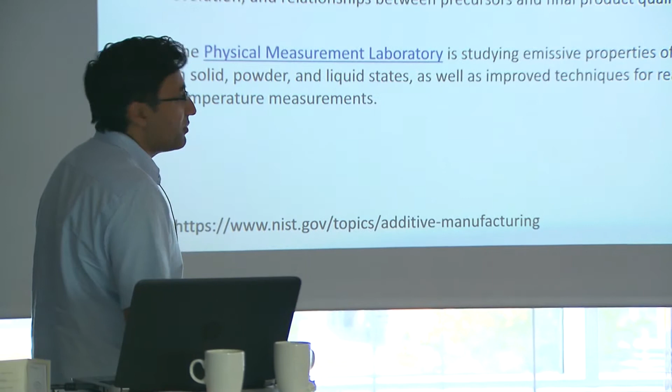As you can imagine, there's a huge interest, and there's a very large program at NIST devoted to additive manufacturing and pushing it forward. If you're interested, you can go to this website or just ask me, and I can put you in touch with the relevant people working in additive manufacturing.

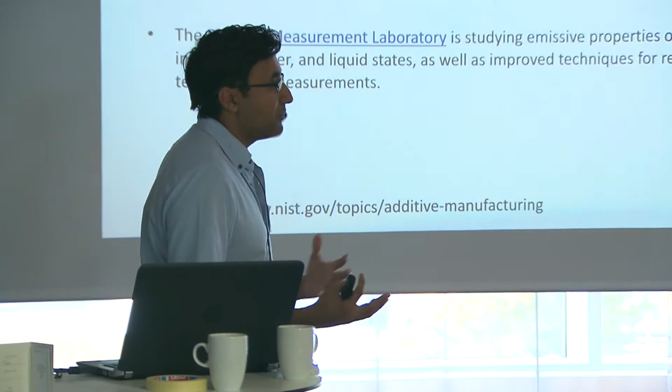Very broadly generalizing here, the engineering lab is working on things like material characterization, process control, and how to improve the final quality of the product. The material measurement lab, which is mostly chemists, is working on the relationship, amongst other things, of how the starting materials' quality affects the final product's quality.

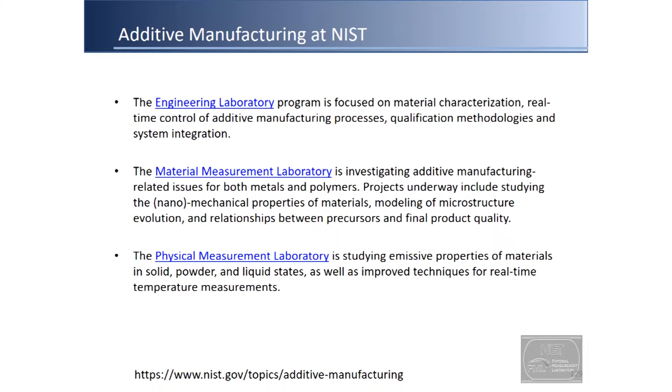Then you have the physical measurement lab, which is mostly physicists. I'm a chemist who works in the physics lab. There, the focus is mostly on developing new measurement science tools.

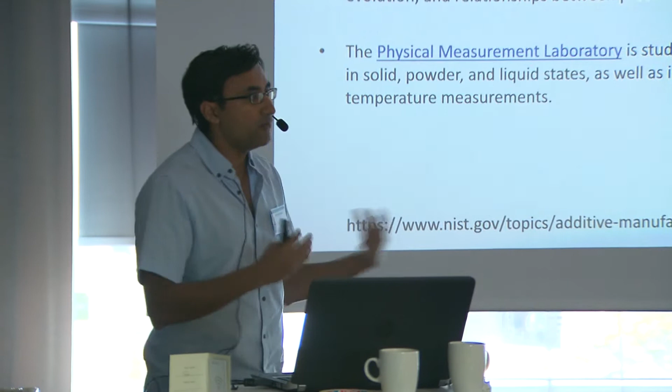The idea here is, for instance, to be able to measure temperature by looking at the emissive properties of materials, so you can have better process control. This is a holistic program that looks at the entire process and how we can improve it to push additive manufacturing forward.

At NIST, I'm part of what's called the thermodynamic metrology group. That's a group charged with the realization, dissemination, and maintenance of the national standards for temperature, pressure, humidity, vacuum, and helium leaks. We provide the basic calibration services, but we also do a lot of innovative research.

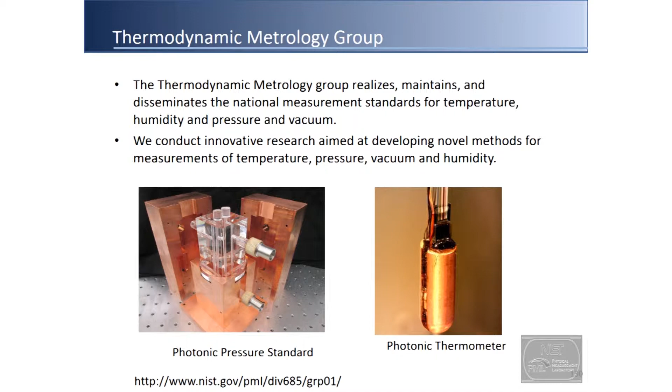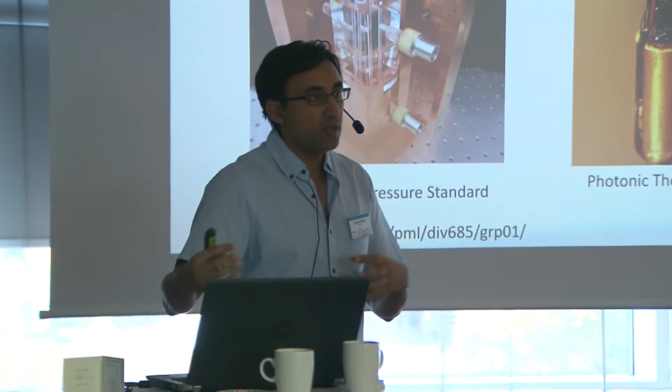Over the last few years, a lot of our focus has been in photonic sensing. One of our projects, led by Jay Hendricks, has been on photonic pressure standards—rather than using mercury manometers, using the refractive index of gas to define pressure. My team does mostly silicon photonic sensors, so a lot of work in temperature, but also in humidity and increasingly in pressure.

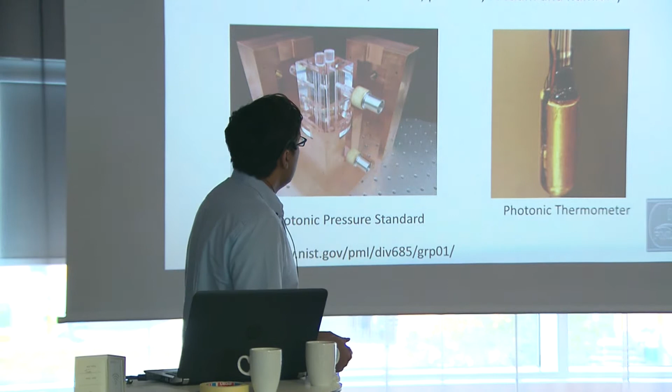So you might ask, what are people who do photonic research doing in additive manufacturing? Well, we're mostly approaching this from the perspective of the users. We want to do what almost every user playing around with 3D printing is doing, which is to conserve their resources, time and money, and we want to take advantage of the freedom of design that comes from additive manufacturing.

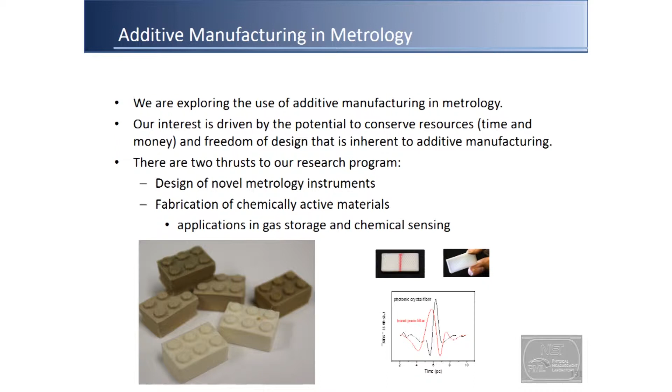Sometimes that freedom comes. There are two areas we're interested in. One is instrumentation: can we shrink it down, make ours more deployable, more easy to use—almost, it's a crude way of putting it, but idiot-proof in a way. The other is this idea of being able to do chemically active materials.

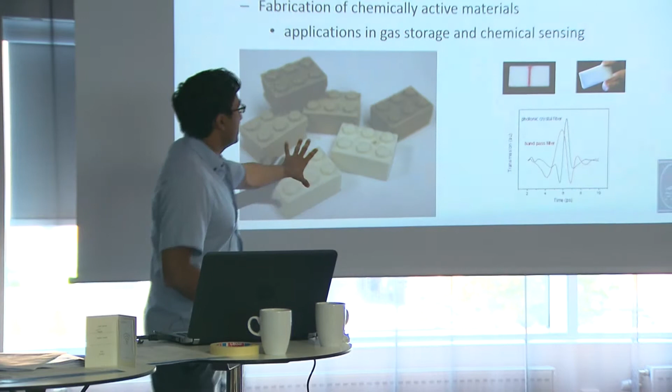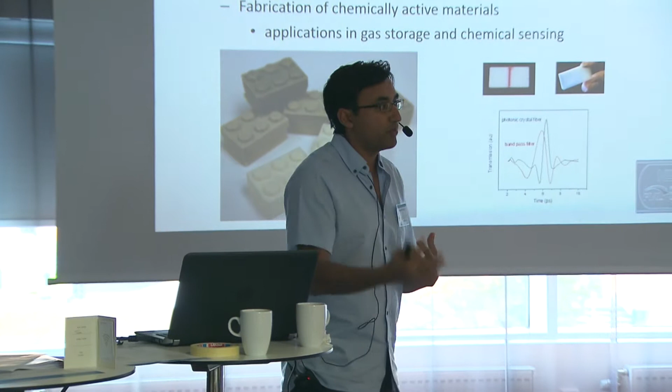So make little blocks that can store gases, release gases on demand, and are safer to handle, and also be able to print sensors that can pick up gases and give us information about what gases are present. These would be things you could do in the terahertz or microwave range—again, building chemical sensors, things like that.

Let's talk about metals first. Our interest in metals came because we have a team—Jim Fedchak, Julia, and Steve Eckel—working on this. The idea here is to make a new national standard for vacuum.

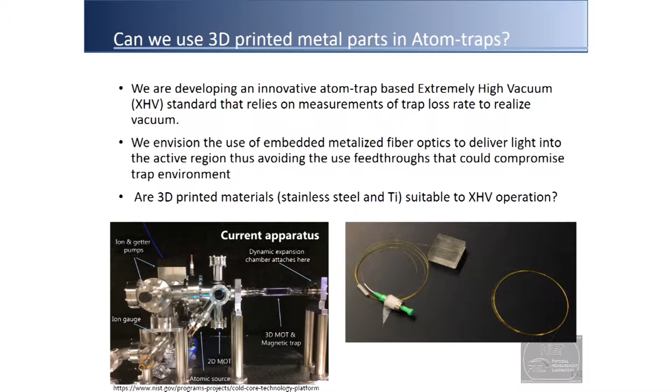More specifically in the XHV range, that's 10 to the minus 10 pascals or lower in pressure. The idea is to look at the loss rate from an atom trap. If you can calculate the collision cross sections of the atoms in the atom trap really, really well—that's the big push in that particular project—then you should be able to look at the loss rate and relate that to the residual gas pressure present in the chamber.

That's how we wanted to be able to define ultra high, extremely high vacuum. This is the apparatus as it exists—this is a MOT, so you can see it's a very large thing, with a lot of connectors and things like that.

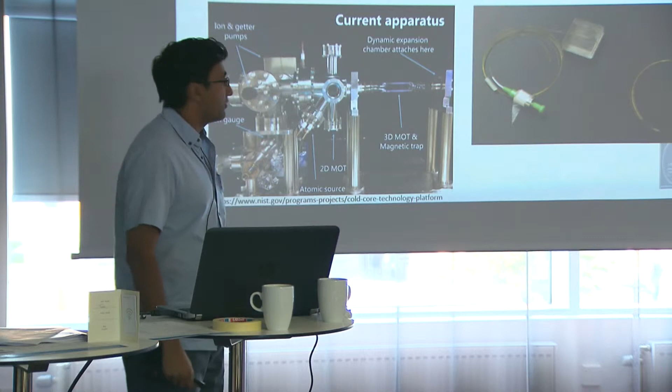One of the questions we have is, can we, rather than doing free space optics, bring waveguides directly into the chamber, eliminate all of these feed-throughs and other connectors where things can leak, and really create a more compact, robust system suitable for these sort of operations.

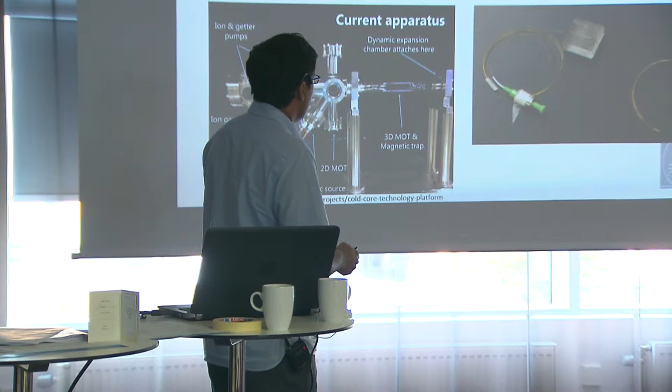We've been playing around with embedding fiber optics in 3D printed materials. We've mostly worked with plastic materials, exposing these to radiation and things like that. So kind of some fun experiments there.

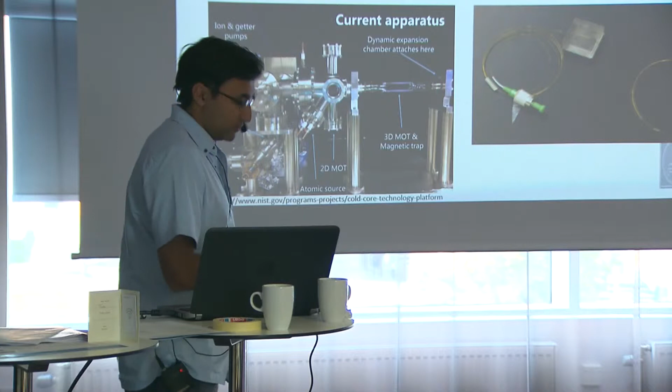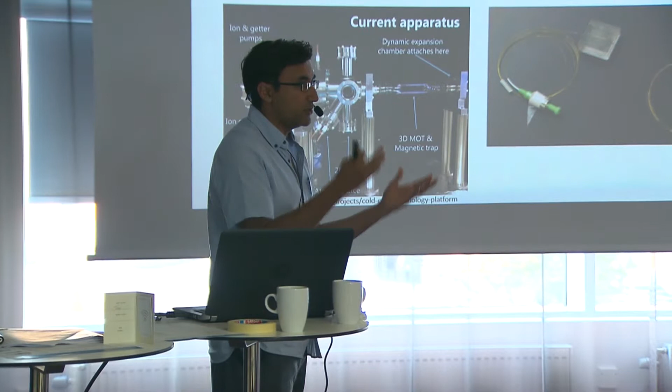But before we can do things with metals, the question we always had was the same one you guys had in the UK: you're creating these 3D printed materials, they're lighter, the density is lower, so there are all these voids. Are these suitable for XHV applications?

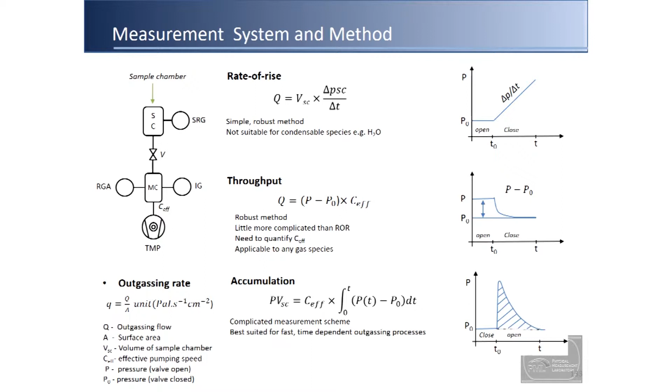The basic measurements we've done are the same ones everyone in vacuum does: the rate of rise, the throughput, and accumulation type measurements. We can go over these if you're interested. Again, the measurement protocol is the standard one people have been doing in vacuum science for a long time, and it's very laborious and time consuming. Basically, you're trying to get rid of all the water and hydrogen gas in your sample holders. Once you do that, you can look at what's coming off of your parts.

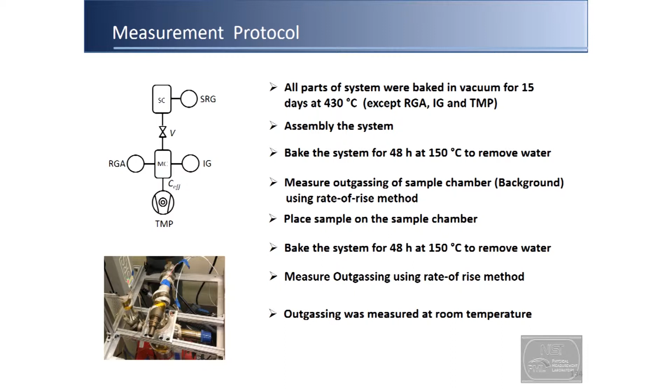So we started with titanium, and these came from Walter Reed National Military Medical Center. We started with titanium sheets because it lets us create a very large surface area compared to that of the sample chamber.

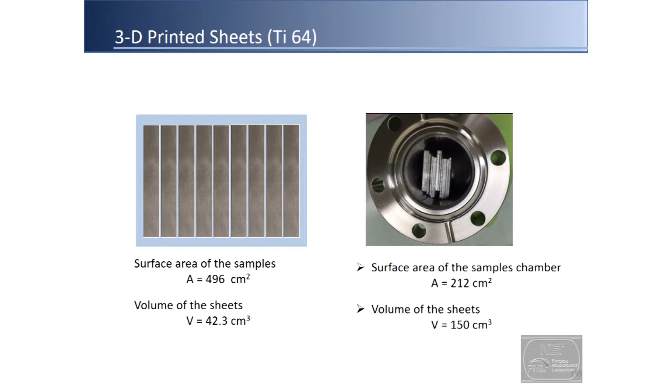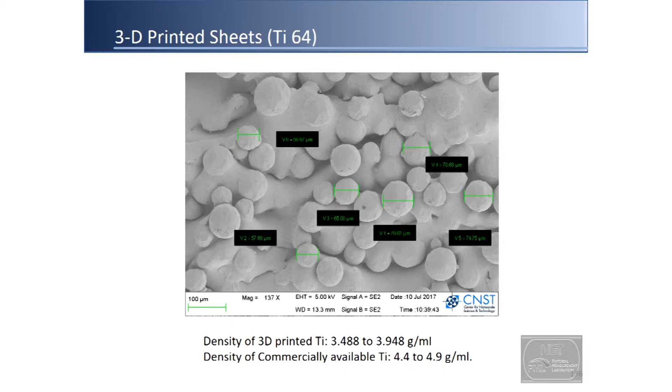So here's an SEM, and this is really what concerned us right from the beginning. You see the SEM, you see all the voids, you see the density drop. So we were worried about water molecules - are there waters trapped somewhere that are going to have a long outgassing rate, and that's going to destroy your vacuum over time? Because we want to get to a very low level and then stay there while we do experiments and have our instrumentation work for a long time period.

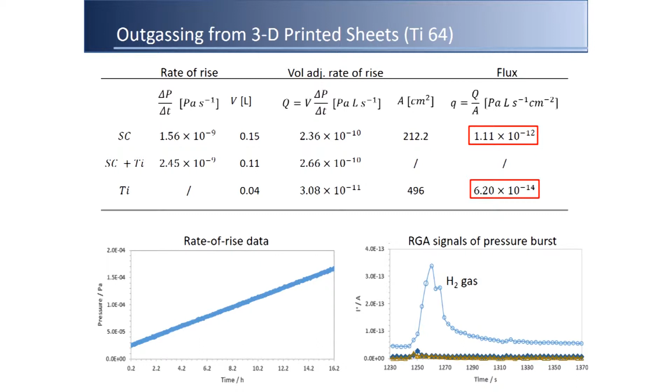So let's look at some of the data. When you look at the rate of rise, the first thing you notice is the sample chamber is pretty much on par with the titanium sheets, even though the surface area is so much larger. That's good news in a way, but from an engineering perspective, the number you care about is the flux, and you can see the flux for the titanium part is significantly lower than stainless steel, which is the good news here, right? This is what you expect to see. What's coming most off of it is mostly just hydrogen gas. So again, these are all good news.

So that seems to say, all right, we should be fine for using these for these purposes.

So we then went ahead and just had some very simple chambers printed. These are test chambers - hollow cylinders - and these tubes here are welded on, and they're meant for a spinning rotor gauge experiment, so you can measure the outgassing rate and how much the pressure is building up as these chambers sit there.

So far, what we can say is that the pumped on curves, just as you found, look very similar for both titanium and the 3D printed stainless steel. And in fact, they're very similar to what's in the literature for normal stainless steel. So what that tells us is the water molecules coming off of these are just sort of interacting with each other, or just with a bare surface. Their activation energies don't seem to be very different from what you typically see in materials.

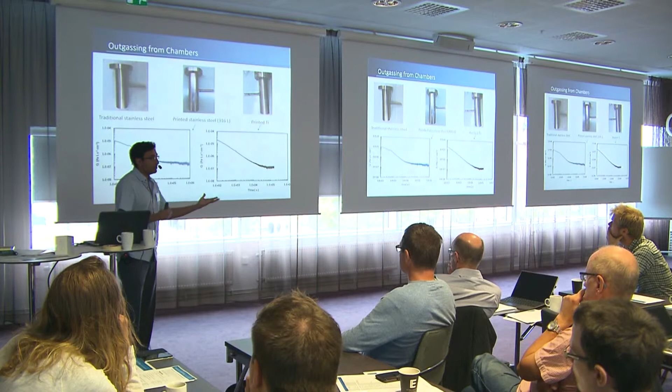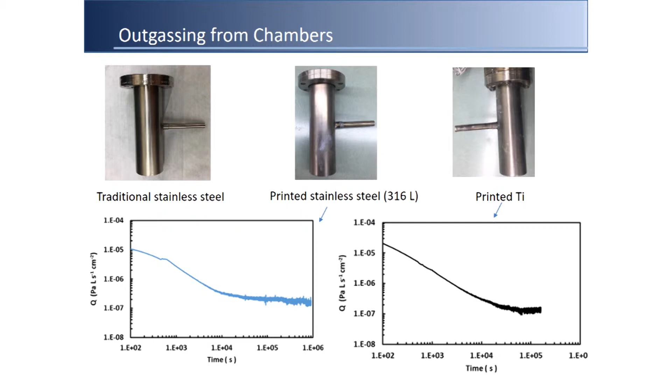Right now, we have experiments going on looking at the activation energies of water. We're doing the same pumped on curves at different temperatures to be able to extract those. So that work is still underway.

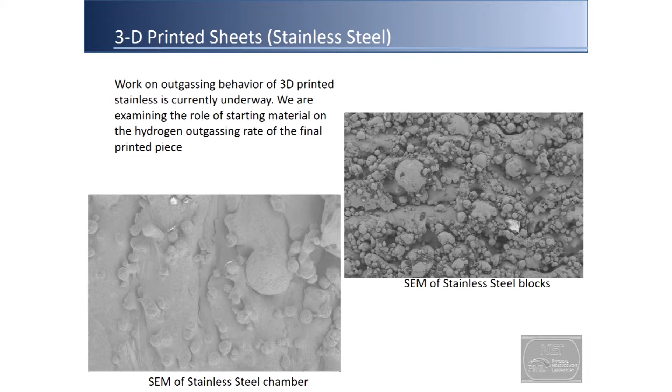With stainless steel, we have some more data on hydrogen outgassing, but we're not quite ready to talk about it - we're still analyzing it. One of the things we're looking at is when you get stainless steel parts made from different vendors, different processes, different starting materials, you get very different microstructures, right? So one question we have is, given the different amounts of additives people are adding, how is that changing the hydrogen outgassing rate? That's sort of work we're working on right now, and hopefully we'll have results relatively soon, just in a couple of months.

So let's shift to some of the chemistry work. This is work going on with our collaborator, Matt Hartings at American University in Washington, D.C. The idea is very simple: can you take the basic feedstock material like ABS, which is chemically inert - because that's useful for most cases - and make it more specifically attracted towards certain chemicals?

So one of the ideas we had was: can we store different gases in here that we can release for our chemical sensing processes when we want them? So essentially on-demand release of chemicals. And also, can we build sensors? With 3D printing - this is something people have done with polyethylene in the terahertz for a long time - you can print waveguides, whispering mode resonators, bandpass filters, things like that.

So our idea here is, if you could make a material that can absorb different gases like hydrogen or volatile organic compounds, then its dielectric constant should change as it picks these gases up. If you could build sensors in the terahertz range, you would have a 3D printed chemical sensor that you could build into your apparatus. So if you had a material that could store hydrogen gas, you could use terahertz to measure how much gas you were loading in real time. There are applications like that we are exploring.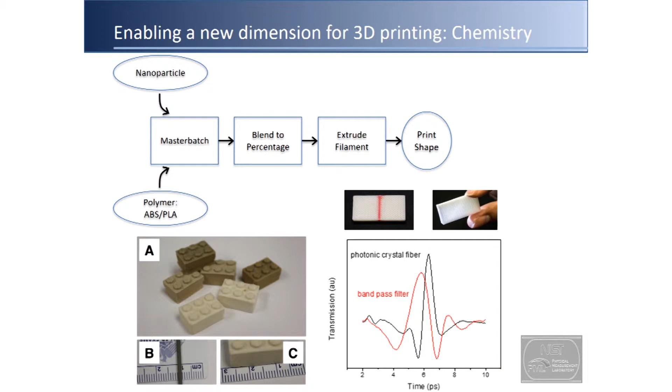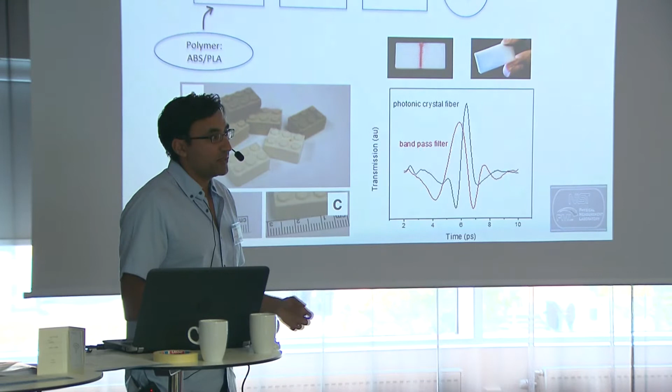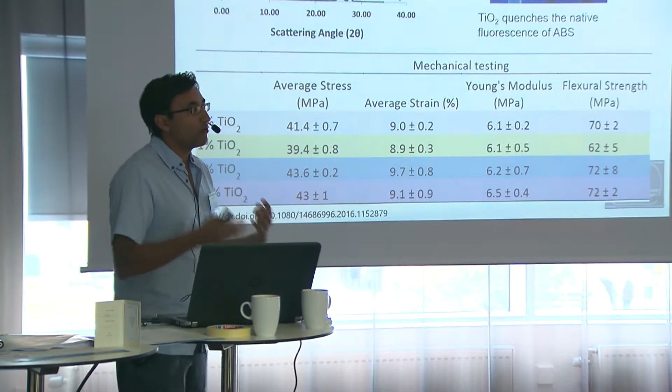Our process is very simple, or at least in theory it was very simple. You start with ABS or PLA, mix in nanoparticles, blend them, and extrude a filament that you can use for printing. Of course, you're trying to find a material that will actually print and won't degrade. So the first thing we did was start with a more robust system: TiO2 nanoparticles, mostly because they're harder to destroy.

One of the first things we did was make different blends. Starting with pure ABS, can we print? Yes, we are competent in that. Sure of our competency there, we went up to 1%, 5%, 10%. After that, it just basically becomes too brittle and doesn't print.

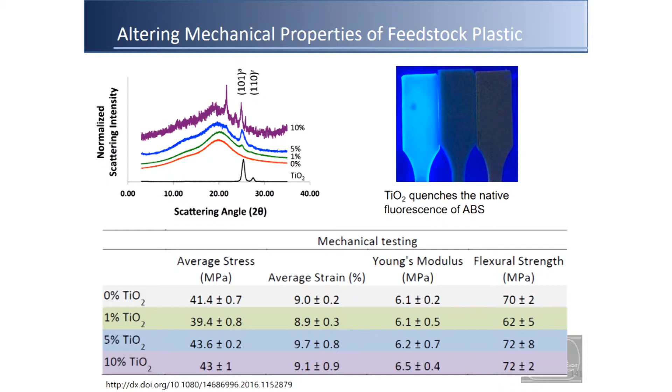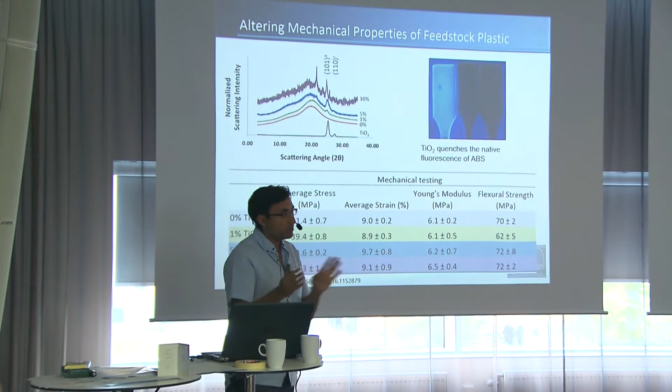So what do you find? Well, when you look at the X-ray diffraction spectra, when you print the piece, titanium is throughout the entire piece, so that's good news. It's not clustering out in one giant chunk somewhere. Its presence definitely changes the optical properties of ABS, so its native fluorescence is being quenched. More importantly, the mechanical properties strengthen up and then get weaker at higher loading factors. When you look at the IR spectra, that's because the TiO2 nanoparticles start to decompose or break down the polymer backbone. So this was an encouraging result.

So we moved on to gas storage materials. The chemicals we chose to work with are called metal organic frameworks, or MOFs. In the gas storage and uptake community, these are very famous molecules, mostly because they have these pore sizes. They are crystal materials with pore sizes you can change. You can engineer how big the pore size is by changing the organic linker molecules, so you can make these molecules more selective towards certain gas molecules. We started with MOF5, which is very well known for its tremendous capacity to store hydrogen gas. I'll tell you why we moved to ZIF8 and HKUST-1.

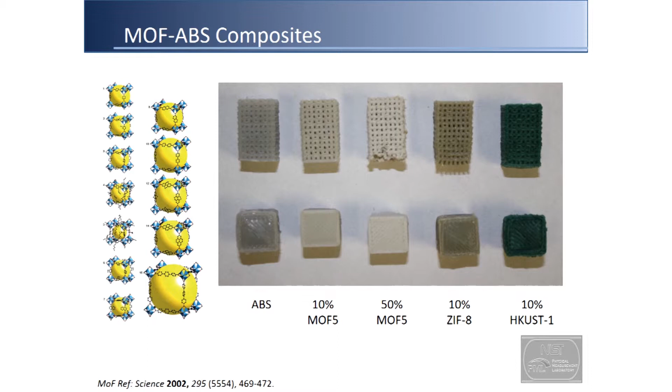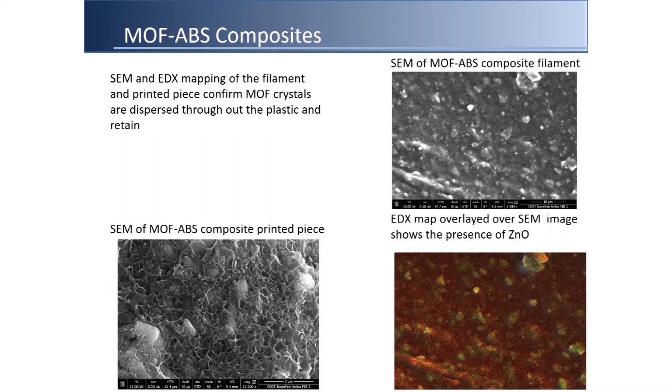Because basically, things that can go wrong will always find a way of going wrong. So we started, and it started out all well and nice. You make your composite, the filament, and you see crystals there. You 3D print the piece, and the crystals are all nice and present. If you look at the EDX map, those are zinc oxide, so these are real crystals, they have the zinc, so everything looks fine. It should work. So let's look at the ABS itself, the native ABS.

Well, it turns out it mostly likes to store water, in fact a lot of water. 360 hours after you bake it out, you can watch the water come on and on, up to 0.36% by weight is just water. The good news is you can still outgas most of this water. So it's still good enough for UHV applications, so we can do our measurements, but you need to bake it for 3 days at 100 degrees to get rid of all the water.

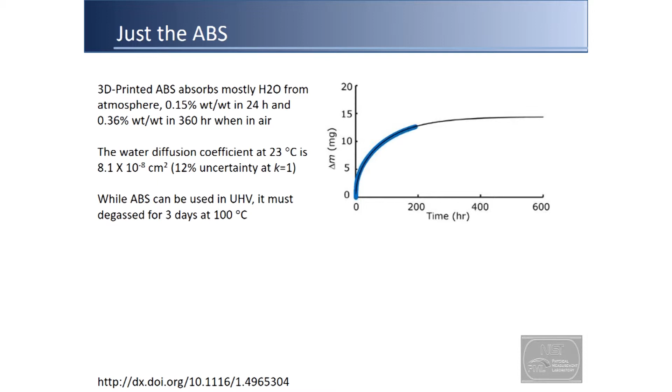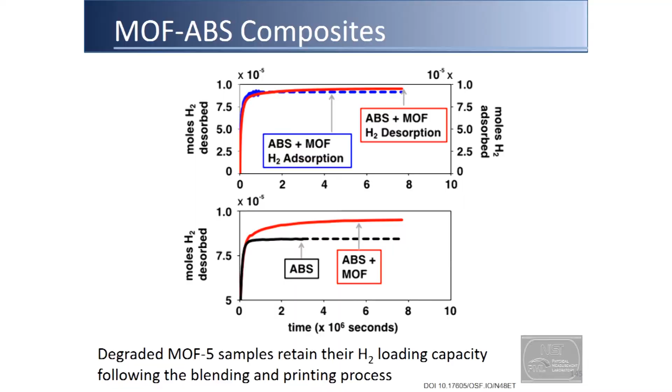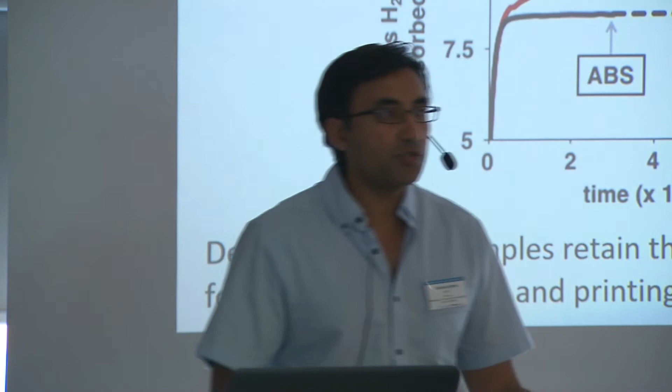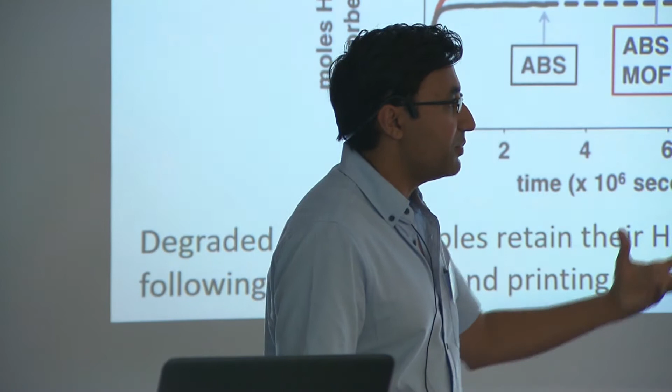So when you look at the hydrogen uptake, you can load hydrogen and desorb it reversibly, going back and forth. If you look at just ABS, the composite compared to that definitely has more hydrogen loading capacity. Now, hydrogen loading capacity was only 33% of what we expected based on theoretical loading capacity of MOF. The reason, unfortunately for us, was that somewhere between the synthesis, purification, and blending process, our MOF samples were exposed to humidity and they decomposed. The values here match up with what people have seen in literature for decomposed or degraded MOF5. So while this was positive in the sense that yes, the idea works, you can process these materials and change the basic properties of MOF, it was a little disappointing that it didn't quite work the way we wanted.

That's why we switched over to HKUST and ZIF8, because they are more robust against humidity. When you make these samples, you blend them, the HKUST is fine here, you blend it in with ABS, you can extrude it, print it, and it sits there for 28 days and nothing bad happens to it. In fact, you can take it, dip it in water, leave it in, come back, and nothing has happened.

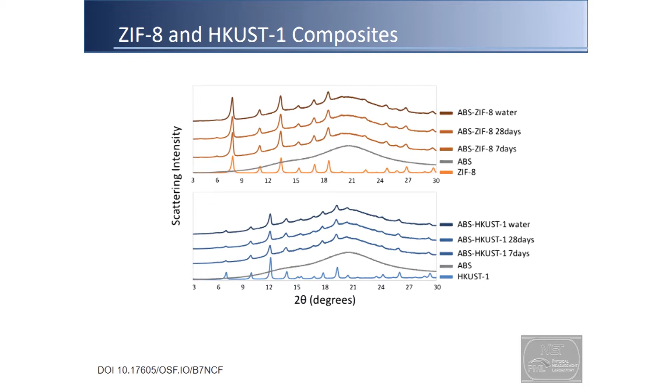Water hasn't diffused through and decomposed your crystals, so that's good news. We've also done SEM, DSC, and IR characterization, so it's all fine.

What we've done up to now is measure the nitrogen uptake for these. You can see here, for different blends between ZIF8 and HKUST, different porosities and different surface areas for different plastics. You can also see the kinetics for loading different gases are different, so you're not just simply changing something in the polymer. This is an actual property of the material you've added to the ABS.

So that's been one of the main questions: are you simply changing something in the structure of the polymer that's changing these properties? What our results indicate up to this point is no, the crystals are actually functioning the way you expect them to function.

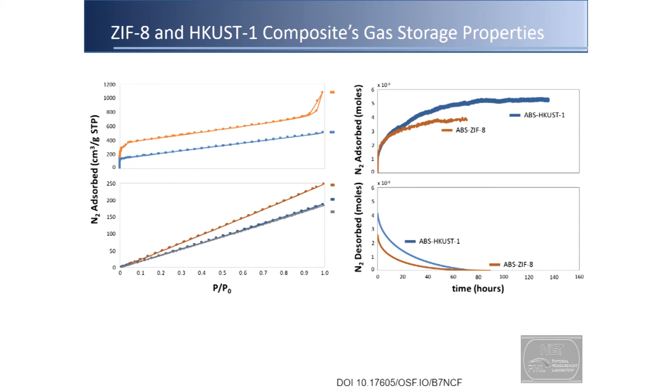The hydrogen work is going on right now, so hopefully we'll have those results, but most of these have already been posted on the archives, so if you're interested you can download them from there. I'll just summarize here.

One of our results so far is, again just like others have found, that titanium and stainless steel are generally compatible with vacuum operations. Titanium was fantastic for vacuum operations; we had no problems getting chambers printed. But we had some issues with stainless steel. Our record was about 33% success rate in not getting helium leaks.

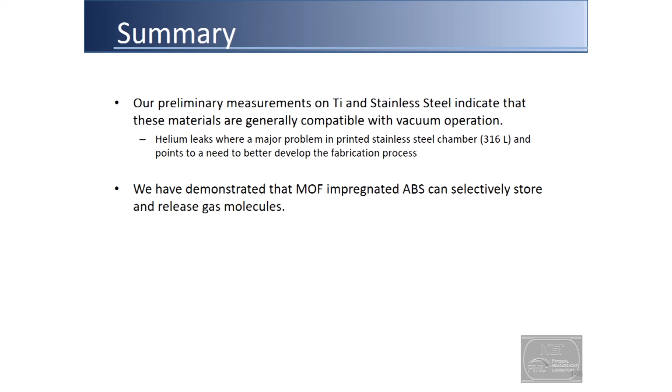Typically what was happening was, first time there were just holes you could see. Second time around the part came in, and once we cleaned it — for us the issue is if people touch it with bare hands, that leaves behind oil that outgasses, so you have to do scrubbing. Once we scrubbed it, there were helium leaks. So that's one thing to be mindful of if you're worried about vacuum operations. Titanium, for whatever reason, works perfectly.

In terms of these chemically selective materials, so far our work has indicated that this is a viable route. You can make materials to store gases and make sensors out of it.